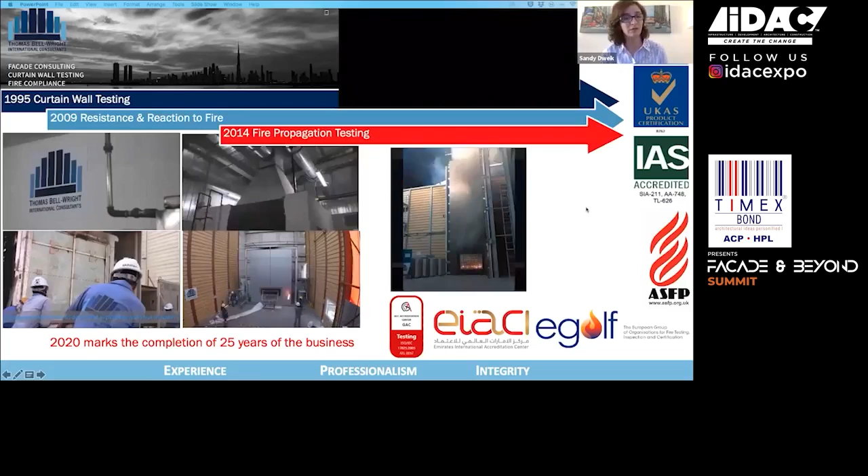For those of you who might already know us, we have started 25 years ago with facade consulting and curtain wall testing. And then we expanded into fire testing of materials and systems. We are based in Dubai. Our company is accredited by UKAS as a test laboratory, a certification body, and an inspection body. We try to think of ourselves as a one-stop shop for all services related to checking facade compliance, including laboratory testing, fire testing, inspections, shop drawings reviews, everything related to delivering a high quality facade.

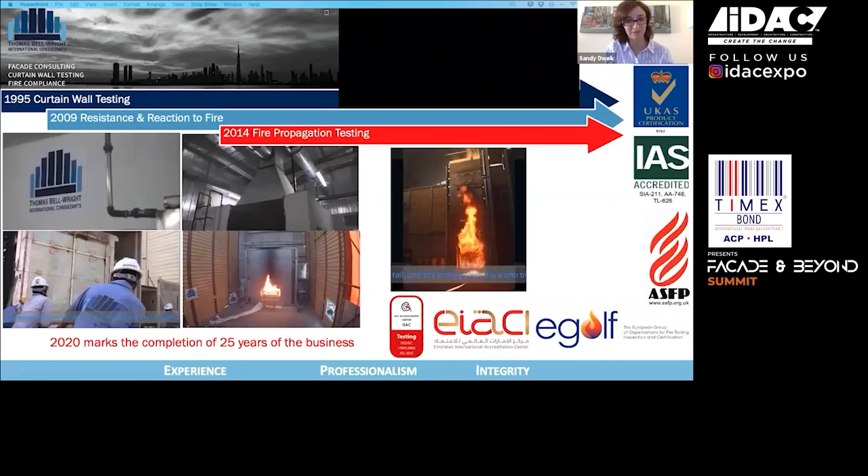So back to our subject, which is the pandemic and how it has affected the facades. So basically, we all went through this painful experience this year, unfortunately, where a new virus was detected in China, and then it spread gradually to the whole world through travel and contaminated surfaces.

In order to contain the spread of the virus, many countries imposed voluntary or compulsory restrictions on travel, on movement, going to work, going to school. And the result was that many people spent a lot of their time at home or confined in closed spaces.

During these difficult times, people felt down, they felt pressured, and they wanted to connect to the outside. The only connection to the outside was through their facade into their surrounding, which can be the facade next door, the street, or any other view they had around them. Of course, human beings by nature are artistic. They tried to make the best out of this. Some people decorated their surroundings, some decorated their facades, in order for other people who look at them to be happier.

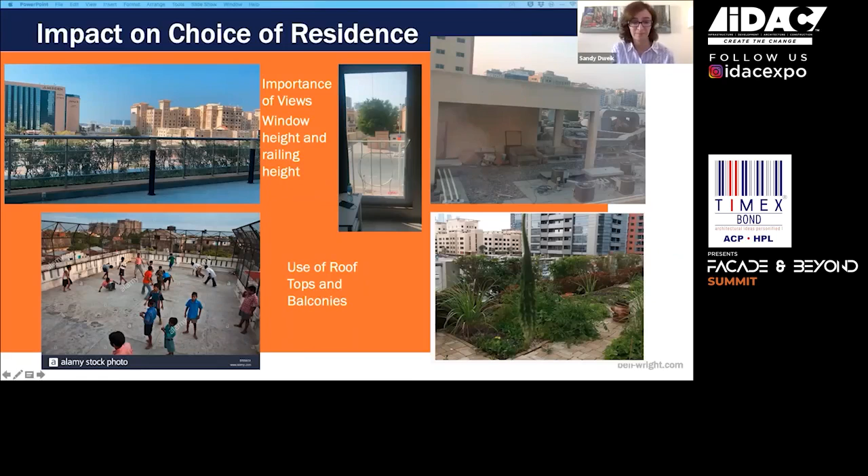With homeschooling and working from home, the line separating work and residence became blurry, it became mixed up. Many companies have already set up for their workers to do their work from home, and this had some advantages that such companies have noticed. They might implement this on the long run because it has its pros and cons.

So people try to make the best of the situation, they try to make their surroundings better. For example, this is a small video of a balcony for one of our managers here at TBW, who decided to make it more green in order to make it more usable.

The impact was the same on commercial buildings, to keep their employees safe. Some companies worked in shifts to enable safe distance, or allowed some of their personnel to work from home. The office space itself became a place for brief meetings and planning rather than for doing the work itself.

Online cubicles or smaller meeting setups physically in the office are now more the norm this year. In a way, the demand on office space has changed a little bit, with the possibility of having a remote office that is less expensive, linked with the main office. Decentralized offices are also a consideration for the future.

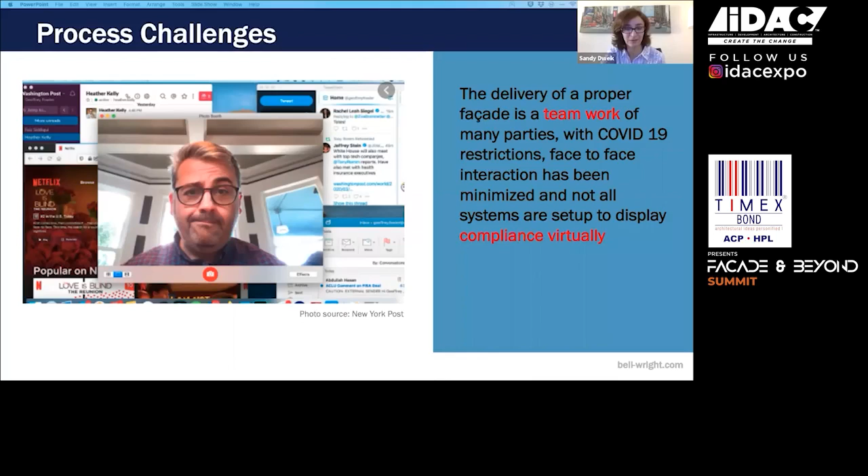But why is the process more challenging this year, and why will it be challenging from now on if we continue with this trend? We are all working from home now. We were pushed into a sudden shift in collaboration and checking process to be more electronic, more distant. With the restrictions on face-to-face interaction, you need the expert eye that is trained to find discrepancies, and you need the expert opinion to give you solutions and oversee any problems before they happen. So we all have to work together, the contractor, the consultant, facade specialist, third-party reviewer, to deliver this remote system delivery properly.

Also, the interruption of supply chain in some industries has moved projects to choosing locally available material and systems to avoid such interruptions. In some cases, the new materials are not exactly the same as what was used before, and they should be reviewed and tested to make sure they serve the same function and work efficiently together. While all stakeholders are doing their best to meet these deadlines, finding alternatives and making sure they work has become crucial, because the work has to be resilient enough to take some changes and to be reviewed properly for such changes.

The testing process itself is also undergoing some challenges. In order to validate the design, a representative of the system should be installed at the laboratory before installation starts at site. In some countries, laboratories are not available, and these mock-ups are shipped to the lab, where testing and installation is witnessed remotely. Mock-ups are also assembled remotely with remote supervision. This is also a change that might go on for a while now, and it might also be proven useful for the future.

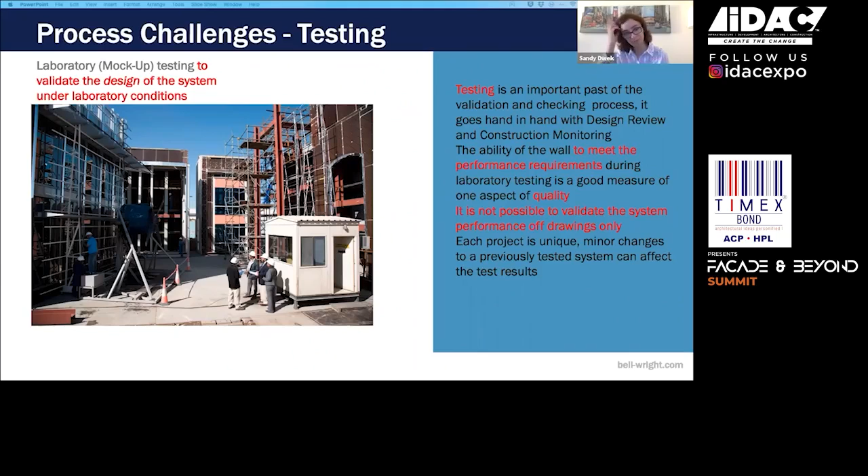An efficient envelope is an envelope that works properly. It is an envelope that does not have any leakage. So you don't have to put your air conditioning on all day to compensate for leakage. You don't have to put your heater on all day to compensate for leakage. During these difficult times, you don't want your power bill and your electricity bill to go up because of an inefficiency in the facade.

Another very important test is a balustrade test. People are spending more time on balconies, children spending more time on balconies, leaning forward. This can be tested. Balustrades can be tested for point loads, for distributed loads. I think this is becoming very, very important.

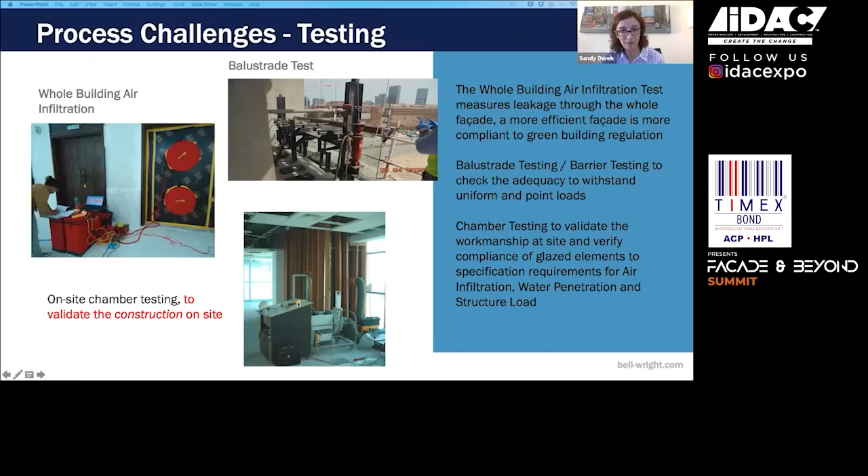Also, site testing to validate the construction on site, with the delay in material reaching the site and the difficulties of construction at the moment, it is very important to make sure that each facade element is working properly according to the performance requirements.

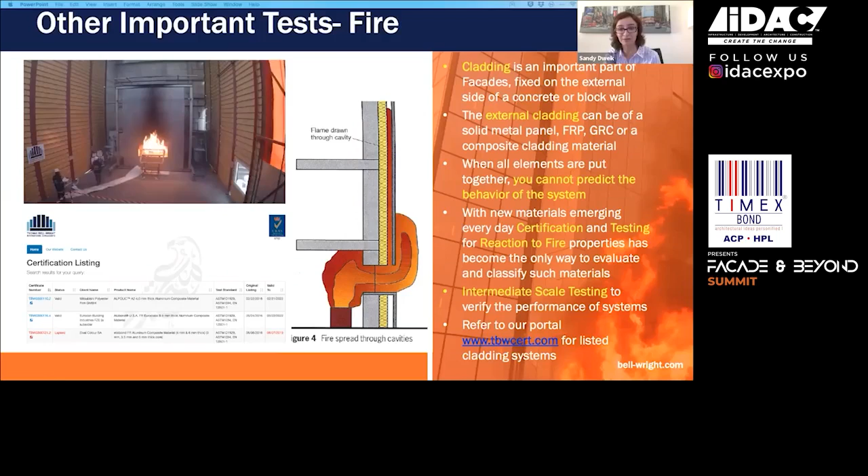There are other important tests for materials and systems which should not be overlooked as well. It is important to specify, choose, and install material with the right combustibility as per the code requirements, and systems that are compliant as a whole, that do not spread a fire in case it happens fast, and give time for firefighters to manage such a fire.

So if you have a project where these specific tests are not possible to do, systems that are already certified and listed can be chosen for your project instead. Such systems have already been sampled in a controlled manner, tested, certified and listed in a specific portal. For example, this is our certification portal, tbwcert.com. You can go there and pick a material or system that is already proven to meet the testing requirements and meet your local regulation, because this is very important and you would not want to have a project where there is a hazard that might happen later on.

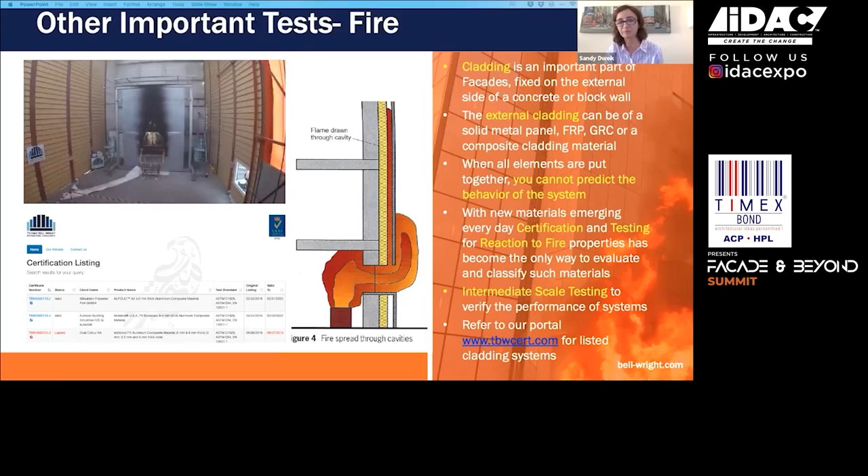With higher building occupation rates, with people spending all their time in residential buildings, the risk is higher, and injuries might be more frequent due to the crowding and the many people using the buildings for longer time. So developers and building owners should be very careful with what they are building from now on, because their reputation might suffer if their projects catch fire, and the expenditure at the beginning to choose the right material and a certified system will be rewarding later on in order to avoid such events.

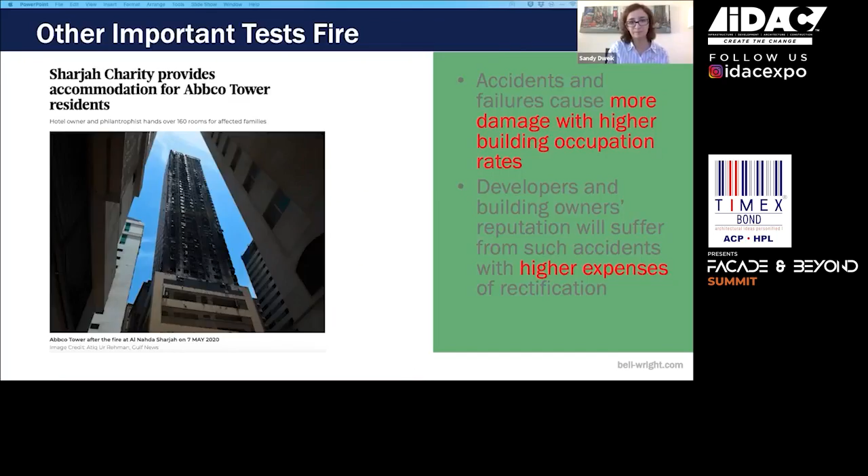Inspection is very important because it's the last step of verification, and it can catch many non-compliances such as deviations from submitted shop drawings or workmanship faults. The project team might have suffered from having some members stuck in certain locations, or groups of workers who were infected, and then other workers coming back might affect the workmanship. To be sure the installation is 100% correct, a skilled third-party inspector can help the team spot non-compliances so they can be amended while the project is being constructed, and not at the end where work has to be repeated.

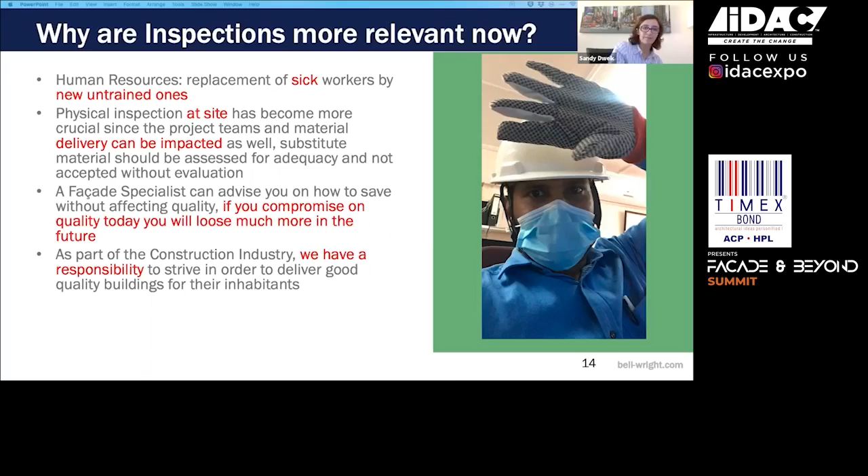People have not had the chance to go out. They are not spending on clothes, on cars, or whatever, but their number one priority has become well-being.

During World War I, people who were sick were put outside to die or whatever, but it was discovered later on that the healing power of the sun and proper ventilation actually helped many people overcome diseases, such as the Spanish flu. And this is translated in today's language to vitamin D and proper ventilation.

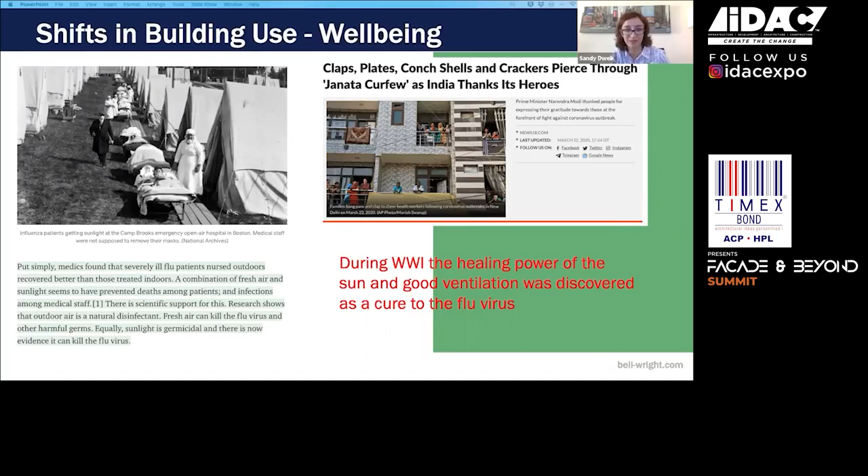All of this has made people much more conscious of their well-being and what the facade can do for them. Do they have balconies? Can they go out? Is there an area in the sun where they can actually get this vitamin D? So this has become a priority for many people.

Not only have people experienced views and external areas, but building users and inhabitants have now had the first-hand chance to experience what an efficient, thermally broken facade can do for them, and a facade that does not have leakage. For example, if you have a window letting in outside air, you have to put your AC or heating on all day. All of this has now become much more known to the public and to building inhabitants.

Bad workmanship and leaking windows and facades contribute to up to 40% of the increase in your electricity bill, and people have sensed that in these difficult economic situations. So again, I would like to emphasize the importance of proper design for a thermally insulated facade, and proper inspections and execution in order to avoid leakage.

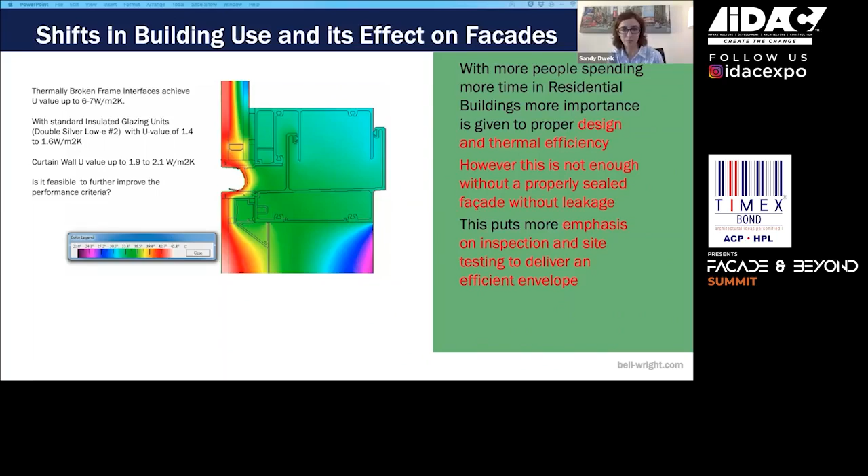The use of the facade is also very important. Clutter on balconies or fire escapes has increased recently, and this is a hazard because you want your fire escapes to be empty - you don't want a source that can ignite on the facade. It is not only the consultant, the contractor, and the people who finish the project, it is also the project user who should be aware of these considerations and the potential source of hazard that clutter can cause.

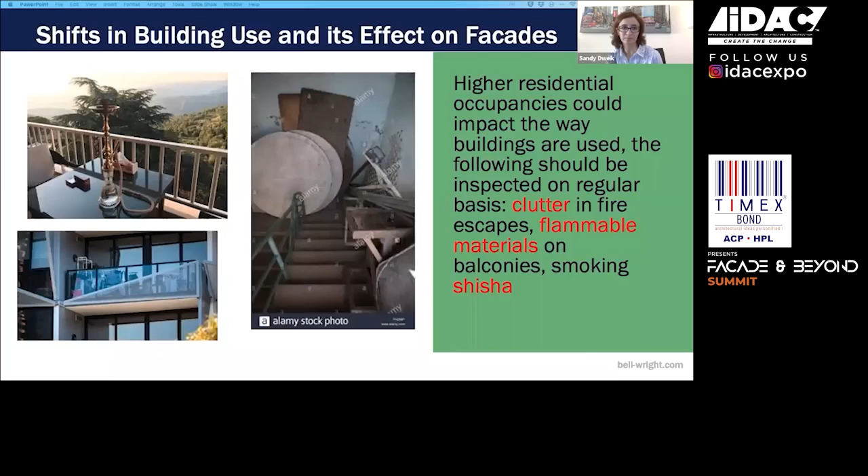So at the end of this presentation, I would like to say that I hope the restrictions we had during this pandemic will end soon. However, the impact of the last few months on the economy might force people to think again and be more creative about workspaces and residential spaces. I'm sure this will be the trend from now on.

Ventilation is quite important - everything that is in a sustainable building requirement, such as views, ventilation, execution. For example, according to a latest study, concentration of the virus in Wuhan itself in an empty hospital was much higher in closed areas such as bathrooms, and the virus stayed for a month afterward, even after evacuating such hospitals.

These are questions we can ask in the future. For now, the consideration we should take is that during this pandemic, people were forced to be indoors for a long time, so they connected to the outside world through the facade, and were surrounded by other facades. So not only did they enjoy having interesting and aesthetically pleasing facades, but they also understood what a sustainable facade is.

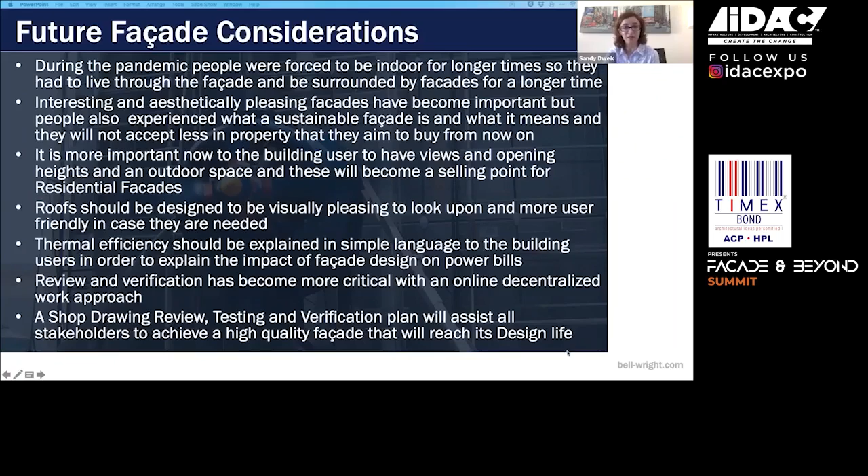As engineers, as facade designers, as facade reviewers, it is our duty to contribute and to have a high quality facade that will reach for a project to reach the design life. So this is my presentation, and I hope that

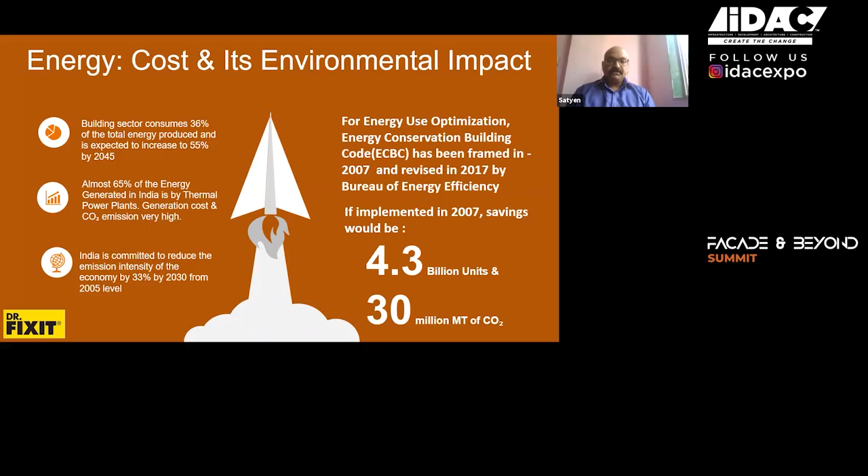India has made its commitment to the Paris Agreement that it will reduce its emission intensity by 33 to 35% by the year 2030. For this, the Energy Conservation Building Code was framed in the year 2007, and it was then revised in 2017. This ECBC code is framed by the Bureau of Energy Efficiency. The survey says that if the code was implemented in 2007, we could have saved 4.3 billion units of electricity, and to add on to that, 30 million metric tons of CO2, which is very, very high.

So this talks about the code in brief. Let me tell you, the main objective of this code is to provide the minimum energy requirements for an energy efficient design for a building envelope and the complete building. The scope of this code is applicable where a building has a connected load of 100 kilowatts or greater, or even a contract demand of 120 kVA, and the building is intended for commercial usage. The ECBC compliance can be achieved by the prescriptive method and the whole building performance method. The prescriptive method is the most easy way to achieve the ECBC compliance, and this can be achieved by new and old construction as well.

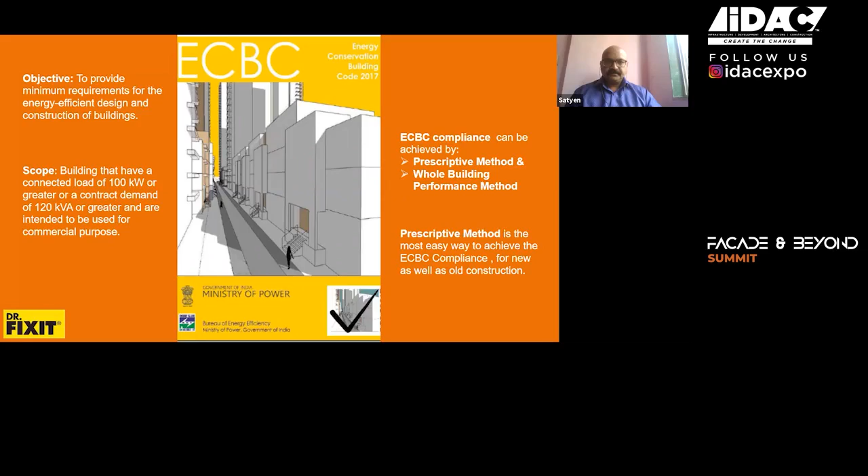This is a table where you will come to know about what the prescriptive method says. The prescriptive method talks about the U value, U factor for the roof, as well as the wall. India has been divided into 5 climatic zones primarily: composite, hot and dry, warm and humid, temperate, and cold. On that basis, you can clearly see what are the requirements for the roof and wall. The roof definitely has a stringent requirement because the heat gain through the roof is maximum, so that's why you will see the U value is very low for the roof rather than the wall.

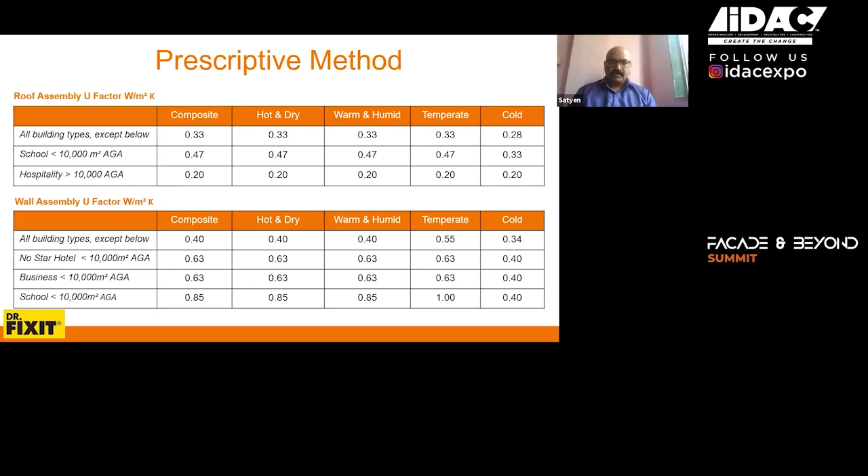So what are the challenges for the facade system? When we come to walls, the present facade systems have their own challenges. The first is very limited aesthetics. Then increased capital cost and operational cost. There is less thermal comfort for the occupants, and also very heavy heat gain. The maintenance cost of the present facade system is very high, and most facade materials are not very environmentally friendly. So how do we face these challenges and eliminate them? What can we do?

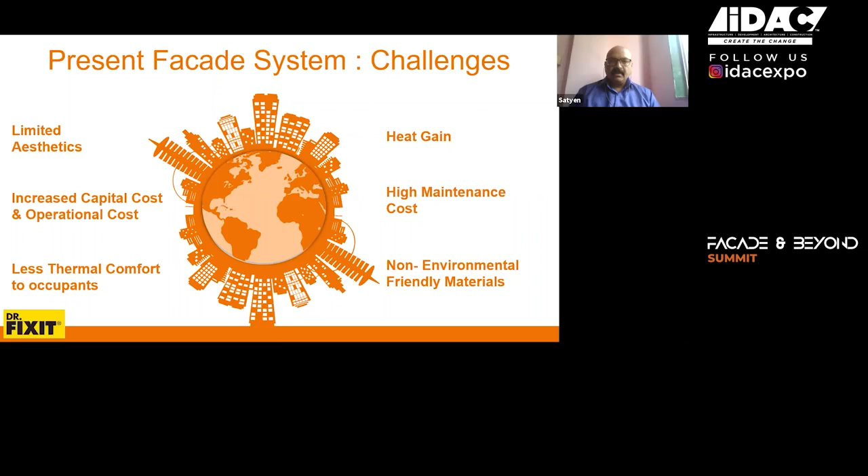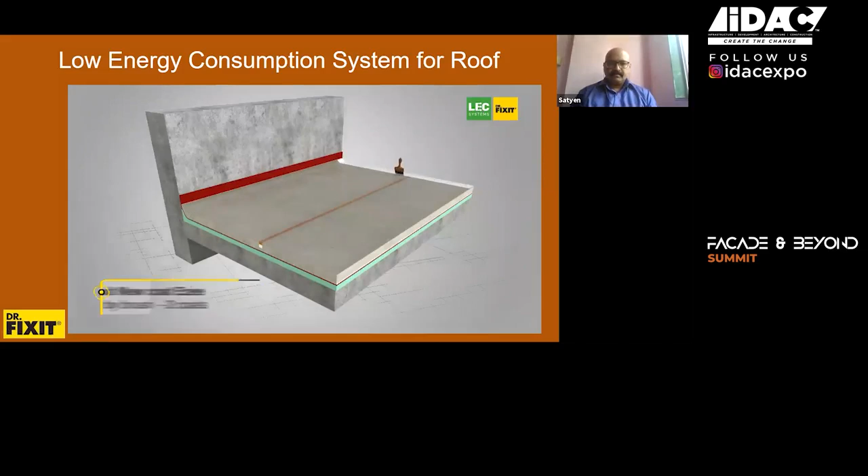So for roof and wall, Pidilite Industries' Dr. Fixit division has come up with two very good solutions. Here is a brief video of how the roofing system works. That was our solution for the roof, a continuous insulation roofing system with a very high SRI of more than 100.

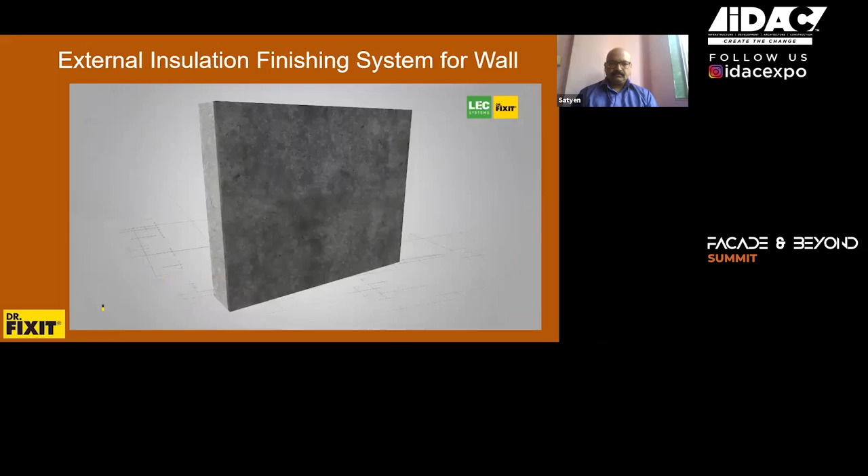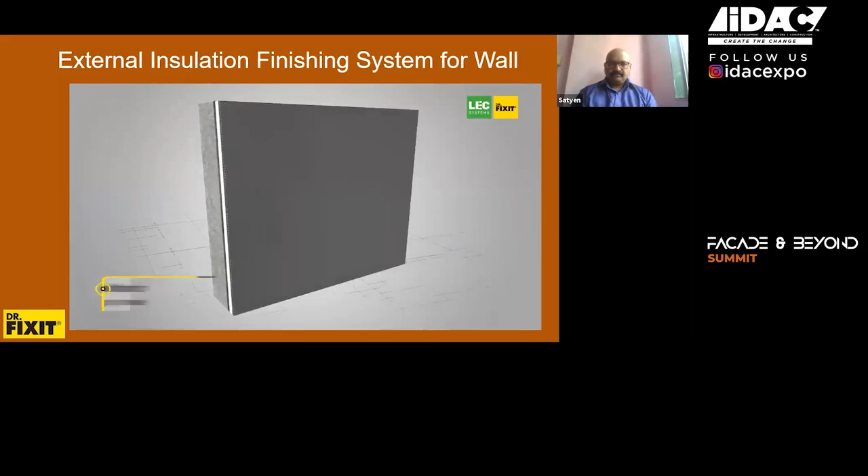Now let's move on to the wall part. What do we have for the walls? This is what we have. That was our wall insulation system.

Now what are we going to achieve with these kinds of facade and roof systems? These are the basic key features and benefits of our LEC system: minimum heat gain through your walls, resulting in thermal comfort for the occupants. We also give you a waterproof and crack-free wall. These systems are also very fire resistant, and you can choose from different colors since it's offered in various shades.

With these wall systems, you can also achieve ECBC compliance for both new and retrofit projects, with a payback period between 3 to 6 years. It will also give you significant savings in your refrigeration tonnage, resulting in reduced daily running bills and improved efficiency for occupants.

These systems also require very low maintenance and give you a faster ROI. We are equipped with a well-experienced application team who have been executing projects for almost a decade with this system.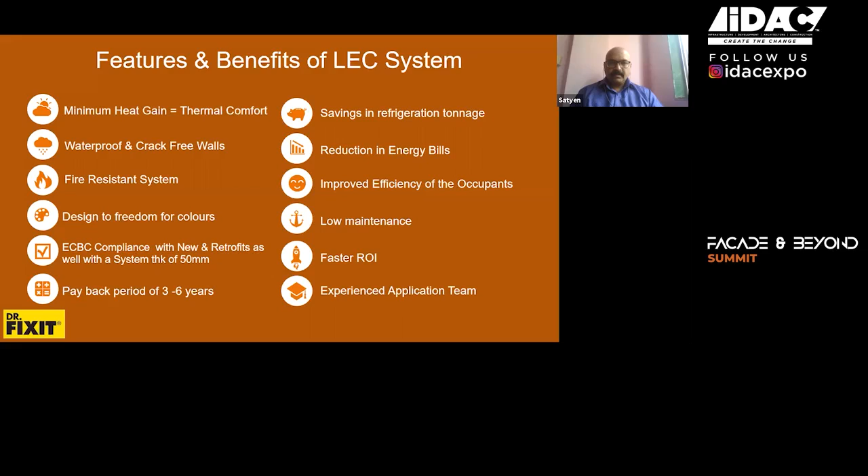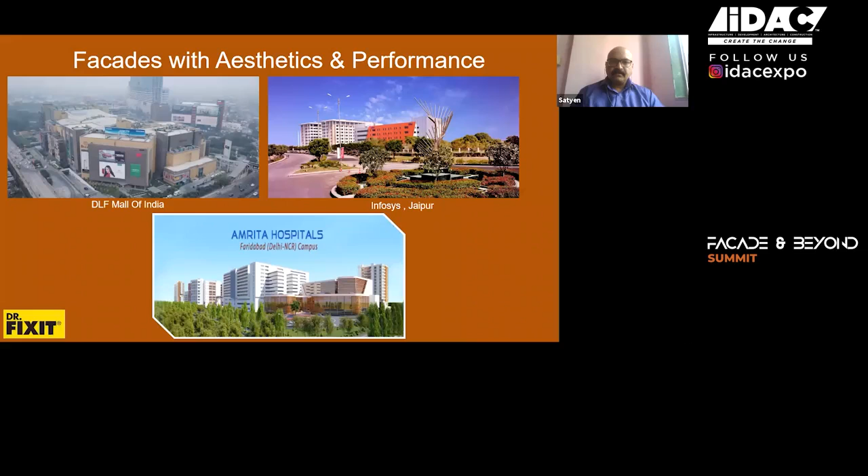These are a few of our credited projects in India, where you can see they look beautiful as well as perform well in terms of aesthetics, performance, and energy bills. You can also see DLF Mall of India, Infosys Jaipur, and presently we are working on a hospital in Noida and a campus in Faridabad. These systems are very much aesthetics and performance based. Ideally, you can achieve an aesthetic look for architects as well as performance for the developer — a win-win situation for everyone.

So let's start then, pulling up the presentation. It's there, everybody can see it? I've put together a presentation on our work at the World Towers in Lodha Place.

This is work that has gone on now for more than a decade, starting with our master plan, which I'll describe a little bit, and how that emerged and developed into architecture over a long period of time, much of which involves facades. A project this large involves a great amount of interiors, a great amount of planning, but ultimately the expression of the project, the image, the iconography of the project comes through its facade, so those have been very important all the way through.

I did this work on the World Towers almost entirely as a partner at Pei Cobb Freed, where I was for 20 years. Subsequent to that, I joined Lodha in-house to work on a very large planning project called Palava, an extraordinary experience. Then post-pandemic, or during the pandemic, I've been more based in New York and have established a consultancy here doing architecture and planning called Halls Lane Studio. Essentially I'm doing the kinds of things I've done my entire practice, albeit from a different platform.

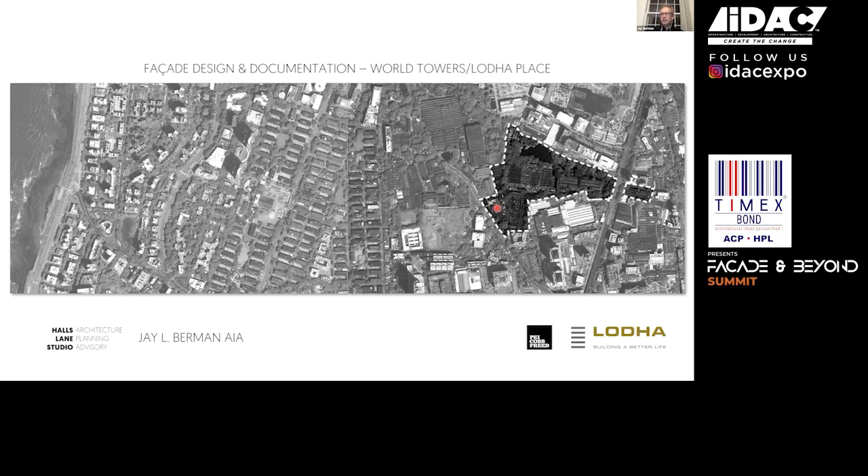We were to begin an iconic development which they imagined would really be their signature going forward. I'm going to skip through a lot of this, but when we began this project, we had been approached by many developers many times to do projects in Mumbai on mill sites. We rejected almost all those opportunities because everybody just wanted to go ahead and build buildings. A 17-acre site in the middle of Mumbai, such a major opportunity.

For us, it's a major opportunity to make a piece of the city, not just stuff that happens in the city. As we looked at the site with its very small amount of frontage on SB Road, but very incredible location, we said the actual major opportunity here was to make a place. The red line curved on this screen that you see is actually, over more than a decade, the most important thing we ever did on this site.

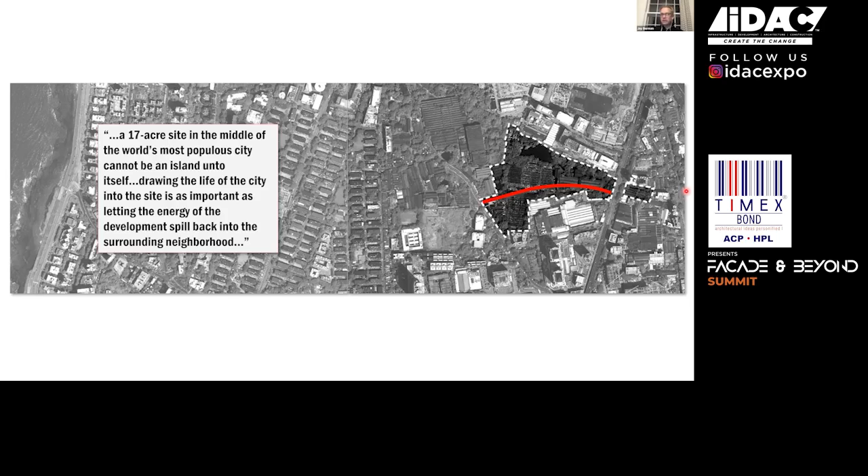Because Lodha Place is a place, it's a street, it's a part of the city, and all the buildings - almost 6 million square feet that we've built in the subsequent time - relies on that for its image and for its iconography, really at the ground as much as at the skyline.

Some quick diagrams from the end of the master plan stage, which took about 6 months, in which we organized the site and figured out the major outlines of how the project would proceed: an avenue, or a lane as we call it, with a gentle curve, 3 very tall residential towers, and 2 gateway office buildings. And of course, a very significant amount of important amenity space for the residential towers, and importantly to us, a major amenity space with a public park with active retail for the city.

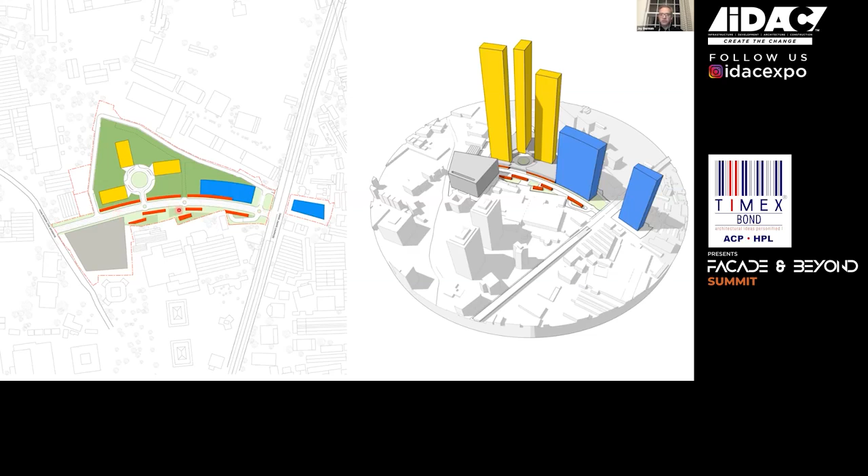Over the next period of time immediately after the master plan, we developed an idea about architecture and what buildings would really look like, but also how buildings would integrate with the city. Most importantly, and this will be a theme as I discuss the rest of the project, what ultimately ended up being 6 major buildings, 3 residential towers, 2 office buildings, a clubhouse, and a whole lot of interstitial tissue which connects it together. How do those hold together visually in terms of image and identity, but also how do they each have their own identity? How do they relate to context, to history? How are they specific to the site?

There were 2 ideas we had at the very beginning which held through the whole process. The first was that this was a textile mill initially, and there was a cue to us from that aspect that has informed all of the facade designs. All the facade designs have this idea of being textures or fabrics, weaving, and the tectonics and visual aspects of the facades all relate to that, and we'll discuss that as we go forward.

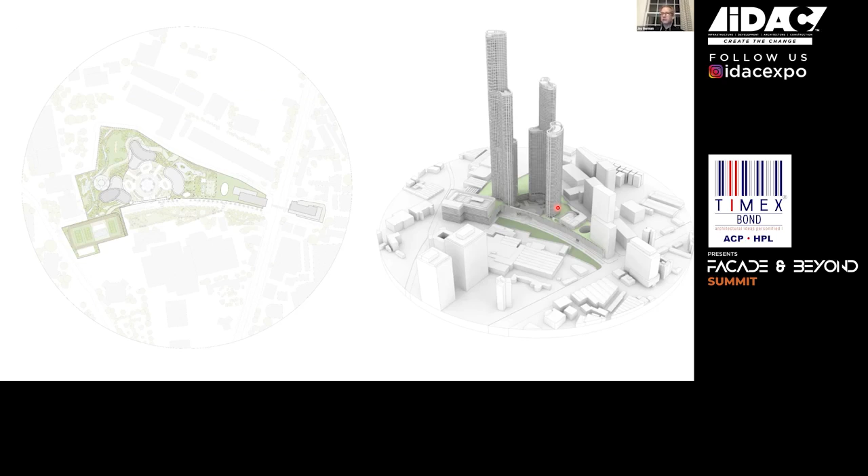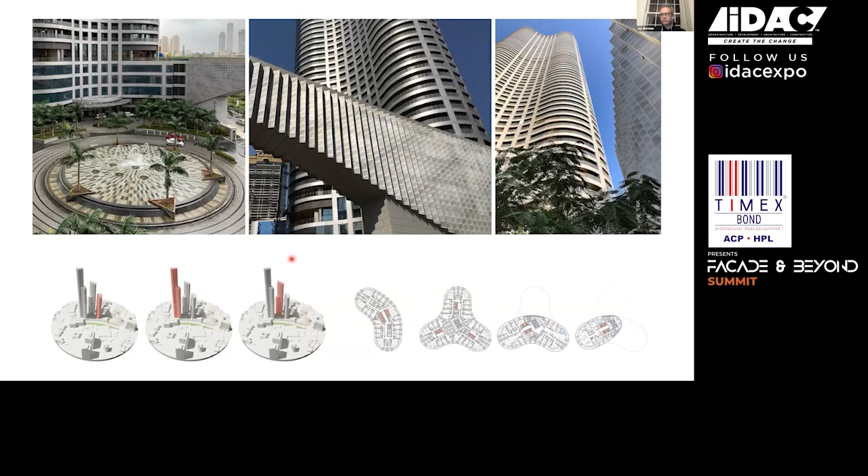Transitions are slow, sorry.

Another group of renderings on the bottom of the screen shows our intentions and how these relationships worked in design, and four photographs at the top show some of the same areas executed. From left: the view from the lane through the gateway towards the towers, then the clubhouse, then the entrance to World Crest, and third the view along the lane.

Most satisfying to me, and interesting to see, are these photos from Instagram a couple weeks ago. Qualia, the great restaurant occupying the space along the lane, took probably a year and a half after opening to start using the street the way we always hoped it would. They did this in response to the pandemic, to have outdoor space, but the canopy and the street feel quite cosmopolitan. I think it's very successful.

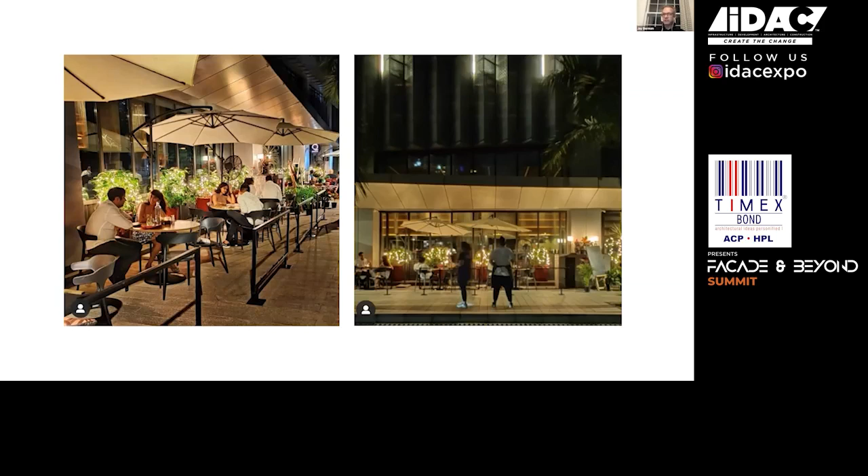Finally, the last piece of this project is One Lodha Place, which is under construction right now. All of the work I've shown you so far in terms of facade is window wall and cladding—very low tech, very straightforward. There were some interesting extrusions along the way, but it's fairly uncomplicated in terms of how it's put together. One Lodha Place is a fully unitized curtain wall.

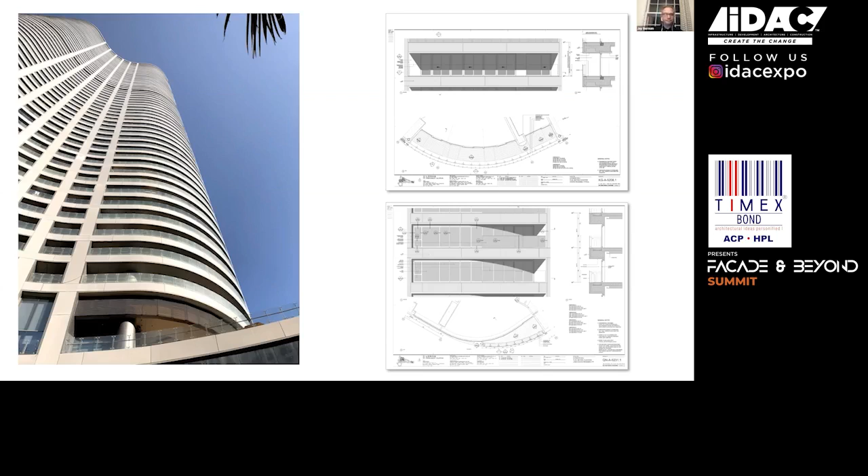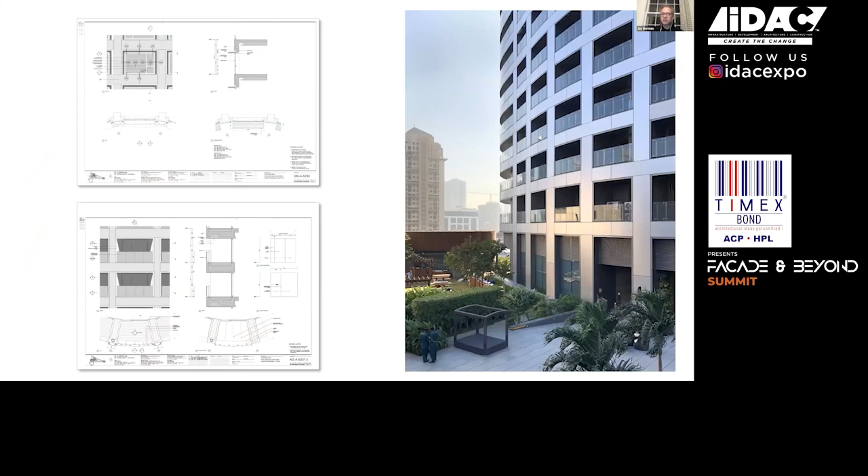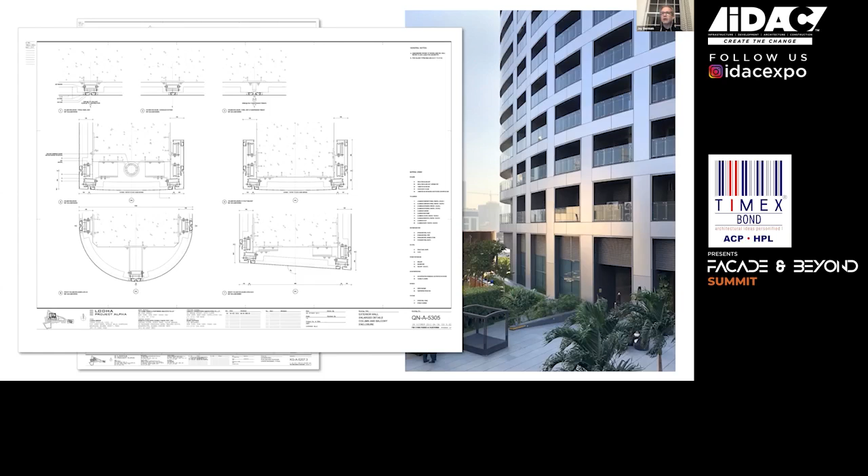The series of slides I'll show now I'll run through quickly, since Nitin will go into more detail, showing how our office developed our intent and understanding of facade in a way that could be enhanced and commented on by Nitin in his process of going from idea to actual building. I'm showing photographs alongside drawings we did to convey the thoroughness of documentation and thought and intention, so that ideas didn't get lost in translation and were worked out well enough at the design stage that they didn't fall apart during execution, or as the realities of how you build this happened.

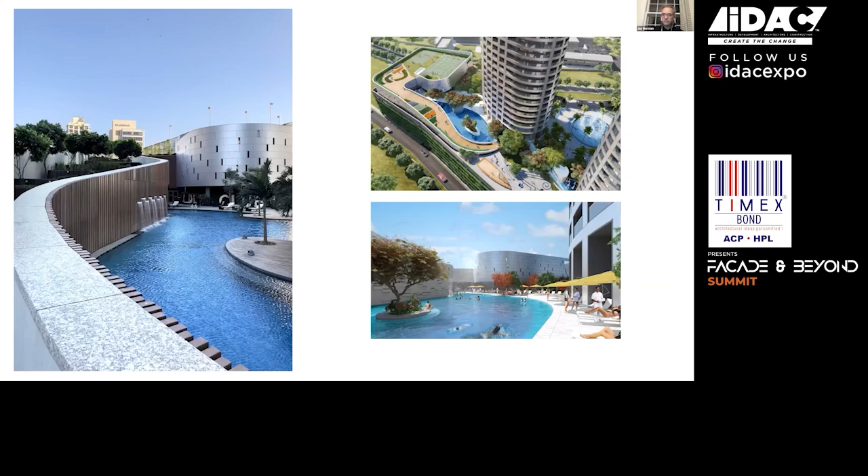The clubhouse—these are all renderings. On the right are renderings, and on the left is the photograph of the finished building. I should say that a couple of other facade consultants worked on some of these pieces, although Nitin has done most of the work.

The clubhouse, after the three towers, was the next facade we designed, and we wanted it to have a relationship but also be different. So it has a material and color relationship. It again has this idea of fabric and textile, in this case a kind of linear fabric with a syncopated rhythm. It had some interesting geometry, some curves, and a lot of parts, and a kind of complexity to it initially, but it's actually made up...

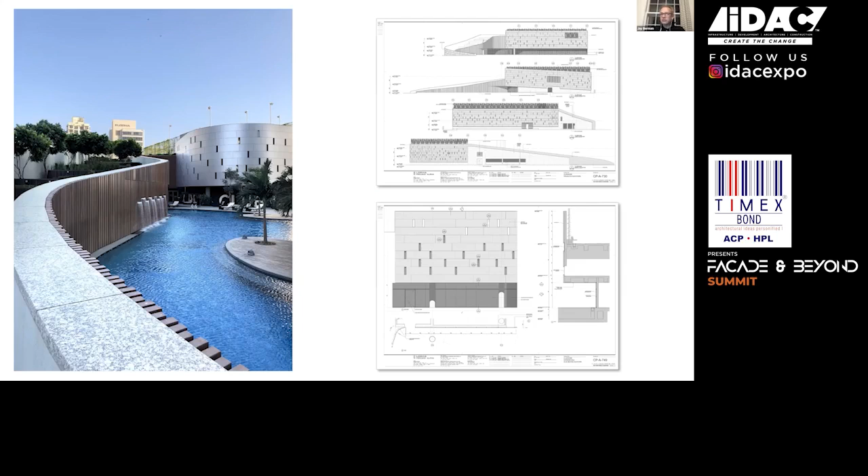It's made up of a very discrete number of parts that repeat. In this case, I think there are maybe four or five panel types, which then get repeated and arrayed. Our drawings were quite explicit about mapping the system and categorizing it.

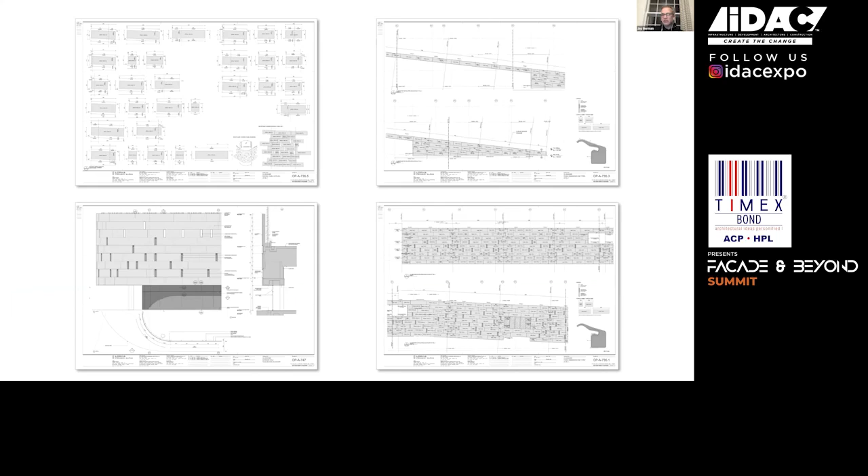Likewise, as we move to the facade that fronts the lane—a very important and iconic facade—at the bottom is retail space and active, nice things. But on top of that are five floors of parking and service, which needed ventilation and had performative aspects. This was a major design exercise to figure out how to create something that doesn't feel like the front of a garage, but feels like a performance worthy of an important new street in Mumbai.

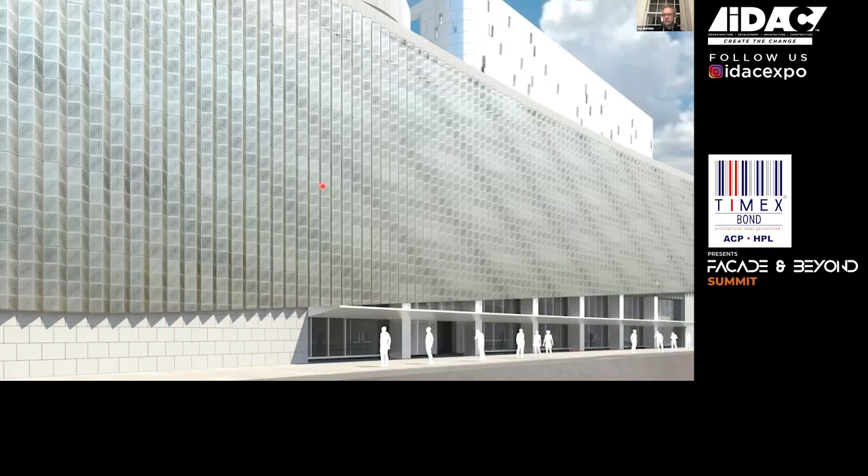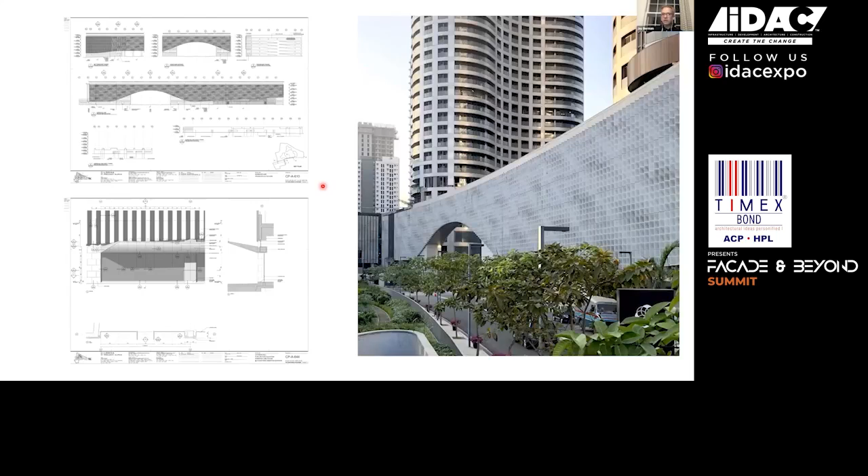This one, in a way, is the most explicitly like a fabric—a kind of tartan. This facade is made up of repeating perforated panels, which look rather complex but again are reduced down to a discrete number of panel types, developed through a parametric process.

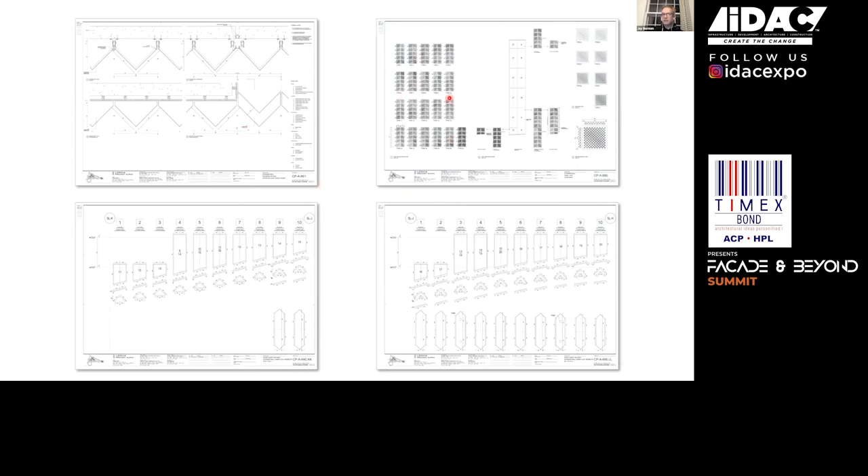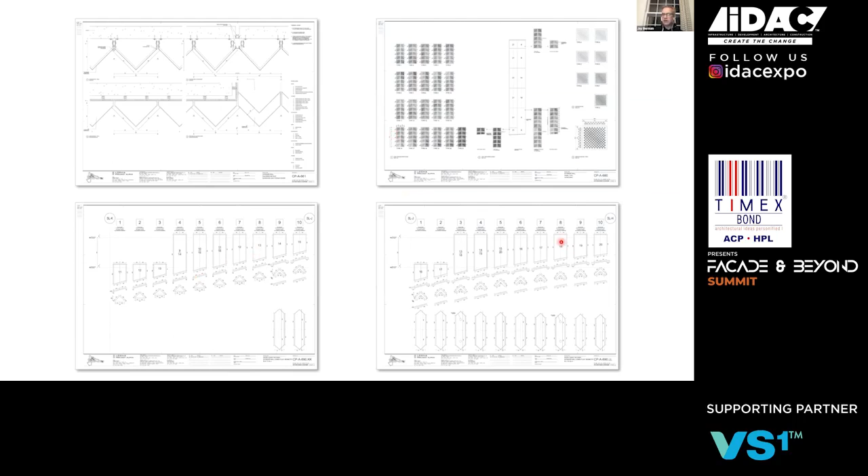The series of drawings you see on the page now kind of indicate the general idea of how it's constructed, the component parts, which were, I think, at the end of the day, 16 or 18 different panels, and then a kind of very rigorous mapping process about how they go on the building. There's a blow up of the panel type, type A through type G of perforations, and then how they combine in different ways.

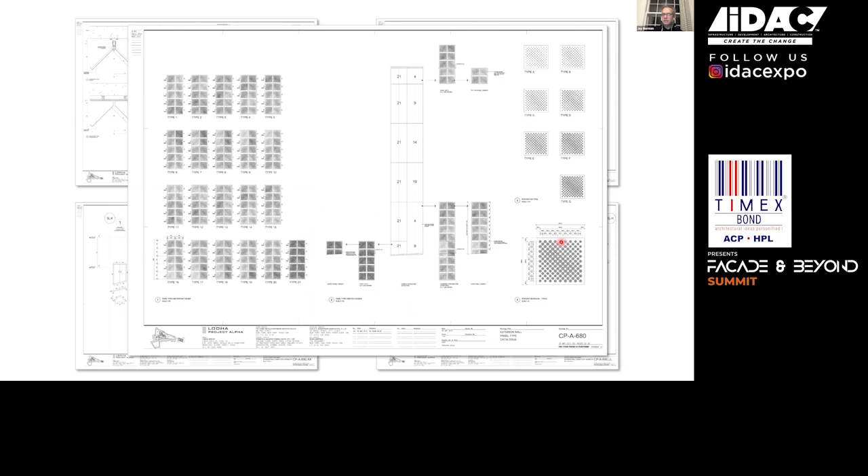That's all. That was absolutely brilliant, Jay. I didn't know of the design inspiration and the fact that you took it from the mills that lay so close to the ground and put it up on these towers, which are going to be there for a very, very, very long time and continue as a fabric of life. Brilliant. Well done. Superb.

So let's get on and see the technical side of the facades. Let me present my screen and show you what we've got.

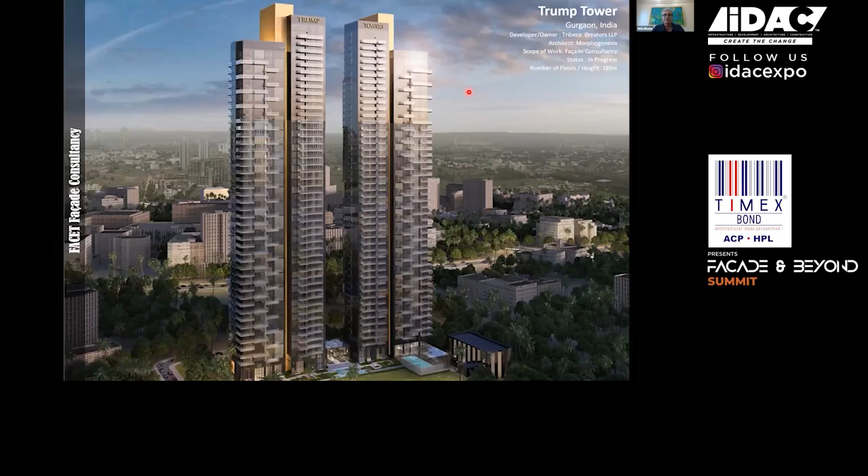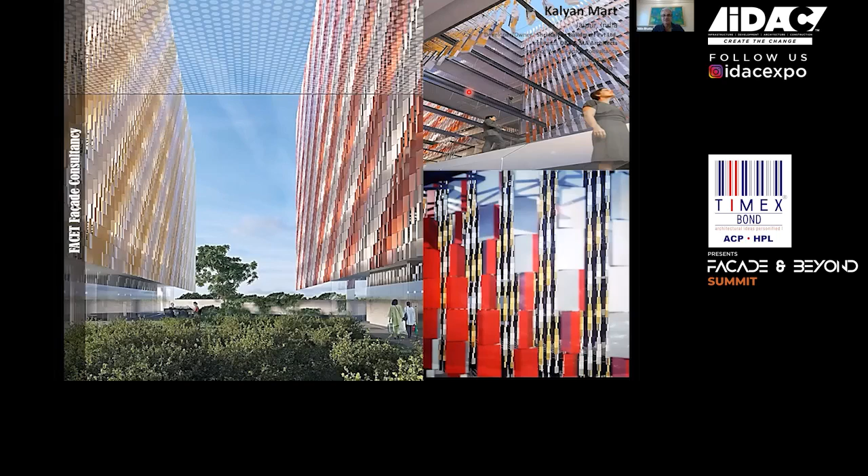Hi, I'm going to take you through a little bit about Facet, a few of the projects we're working on currently: the Trump Towers in NCR and in Kolkata, a 5-building project of commercial buildings in Hyderabad, a very interesting fabric-oriented, inspired facade in Rajasthan, and another very interesting sort of feel of a facade in Qatar.

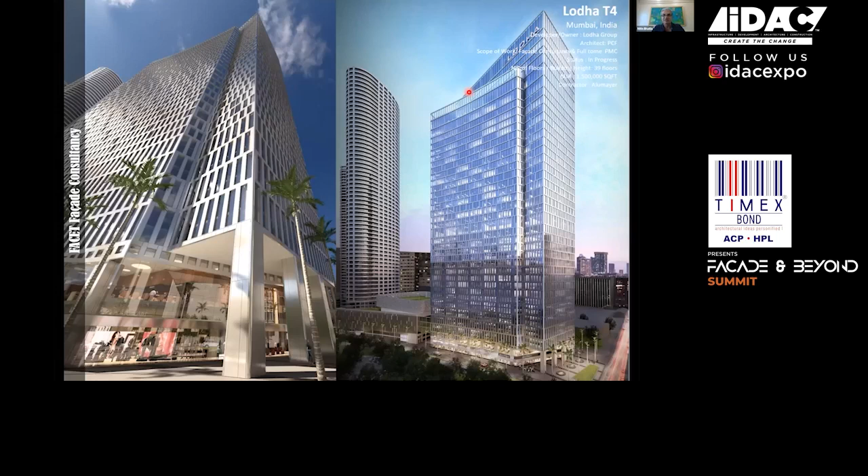This is the top structure of Supremus, which is adjacent to the World Towers across the road. The Tower 4 and the World Towers visible behind. Another shot of Tower 4 that connects to the World Towers. And now finally, the World Towers, the focus of our discussion today.

The inner engineering and performance inside out. What I want to showcase here is what has happened, what has gone through the design of the facade, the technical design, and the thought process that pushed us in our line of thinking to do what we did.

So here are the 3 buildings that you can see. We started on one and then added on the next and then the next. That's how we were appointed on the project. All 3 are sort of similar, though the Queen Tower is different. It has a slightly different facade, but quite similar in nature.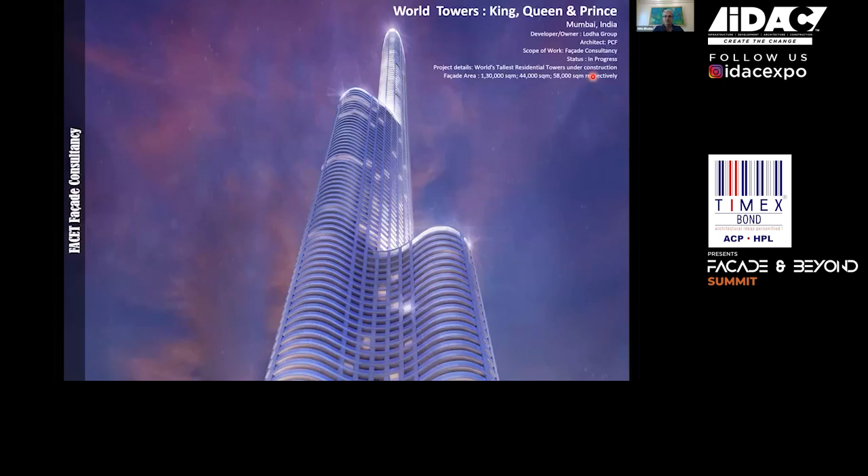Now, when we started working on these buildings, we were told that the client would want to install or complete a floor every week or every 10 days. And the facade design should incorporate a manner or a facility in which the installation could be completed for a single floor in about a week, 10 days.

Before I move on to the actual design—forgive me, I don't have very good drawings to project here—but what we did was we followed a unitized window walling system as well as a cladding system. So everything we did was unitized. You could bring an outer frame, install it, then bring ready-made panels, take them to the respective floor, put them in position, and you're done. So an entire facade like this would get installed in hours. That's how quick it was designed to be installed, and it eventually did when they started installing this.

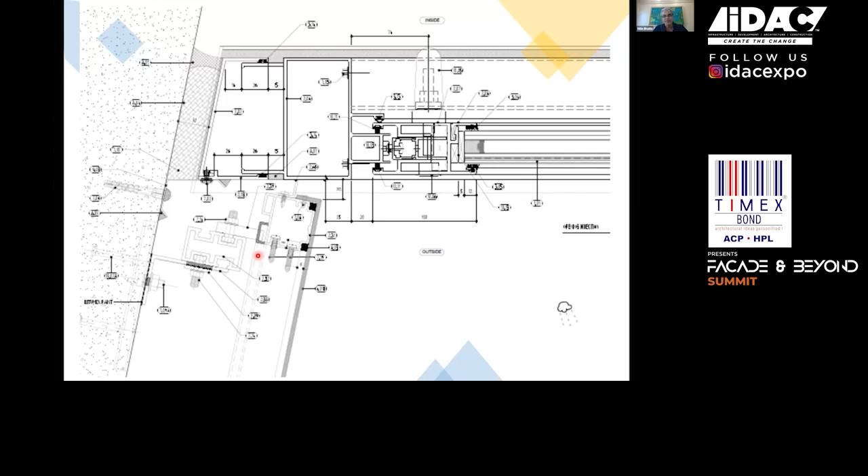The important thing in any building, in any civil structure, is construction tolerances. And these towers were no different. They were very large towers, and obviously there's lots of concrete pouring, lots of formwork and scaffolding. So you would expect some level of building tolerance, which is concrete tolerance. And that's what we had here.

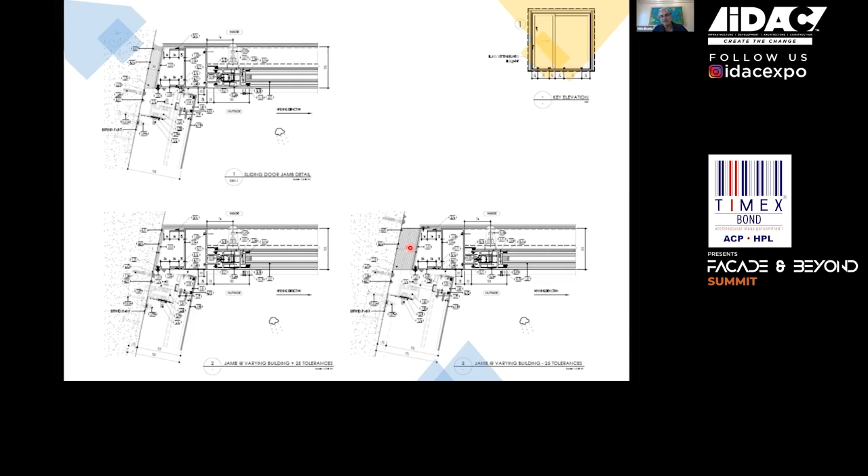The entire philosophy of design on this project was around construction tolerance and how you manage it, because that's one thing that would never hold you up from installing on site, which was so critical.

The system design had to be segmented, faceted. So different strategies were used. We didn't have a typical mullion, but we developed new designs for the mullion and added further strengthening on the inside with these boxes.

Everything was installed, as you can see, in a unitized format, where there was a panel from here to the next module. This was one module and this was the other module. On the left was the other module, and they came together beautifully, tested and performed really well.

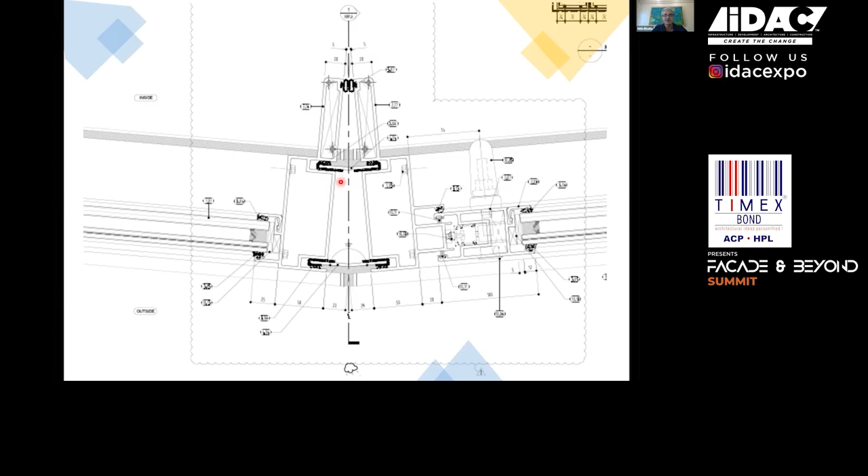Another picture at the head level of the glazing system. Again, we had to accommodate or provide room for construction tolerances, which was ever so important.

There were many other structural constraints or design considerations in the structure we had to consider, including long-term creep, column shortening, and movement of the building. Tall buildings do sway, so you allow for all those movements.

At the same time, make sure you get it installed really quick. So the installation had to be really simple, fast, and very easy for the volume of work that needed to be achieved within a week.

Same goes for the cladding. As you can see, there is the primary bracketing anchor system, and then you had a mullion sort of system every so often, which connected to a hooking system for the actual panels.

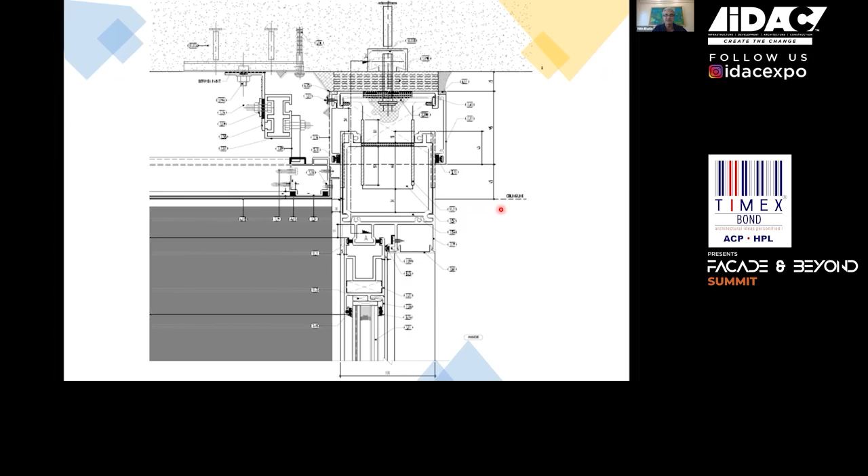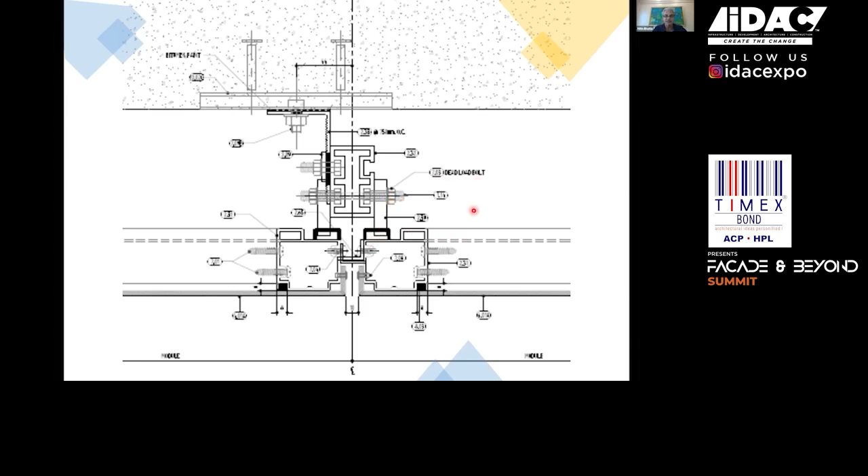Another plan view of the cladding system. Again, I wish I had gotten you better pictures, but I think it gives you a gist of what was being done, how it was being done, and again, a unitized format employed across the board.

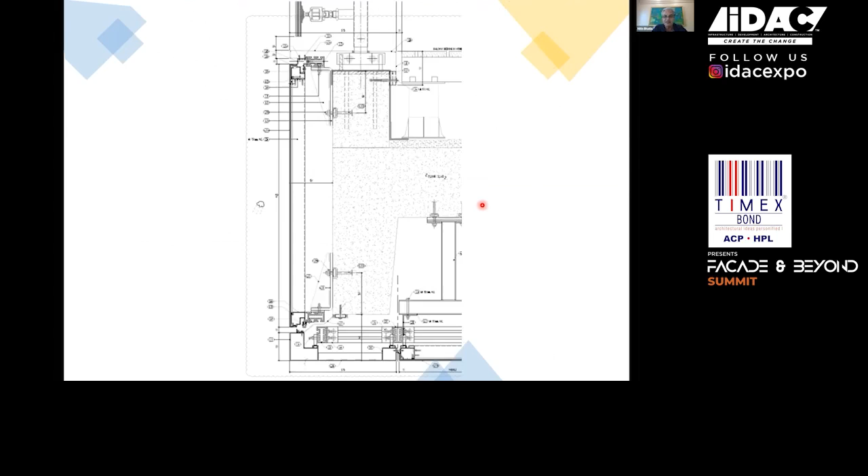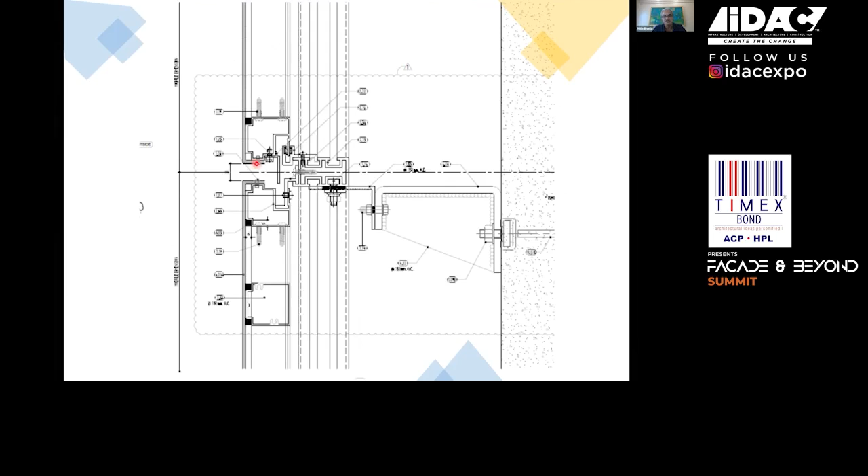The railing systems were, we're still on the cladding systems. And here's a horizontal detail, if you can see over here. Again, it demonstrates how the units come together. They're open grooved, and allow ventilation as well as water drainage into a pressure equalized rain screen sort of system.

These were edge sort of flashings, very key components in the architectural design philosophy, and very important to actually bring in the balcony spaces and connect with the outside. You had the railings, the balconies, and then the outside cladding. To marry all of this was extremely critical and not such an easy task.

But what made it happen quite easily was the method of design that was followed, how it would all go together and how all these pieces would work with each other, allowing movements, allowing tolerances to be accommodated, and keeping water out.

So if you can see this flashing, this is the column, and this is a rain screen pressure equalized sort of cavity at the back, and any water which gets in here wouldn't come into the balcony space. There were drains that would allow water to go out down the panel.

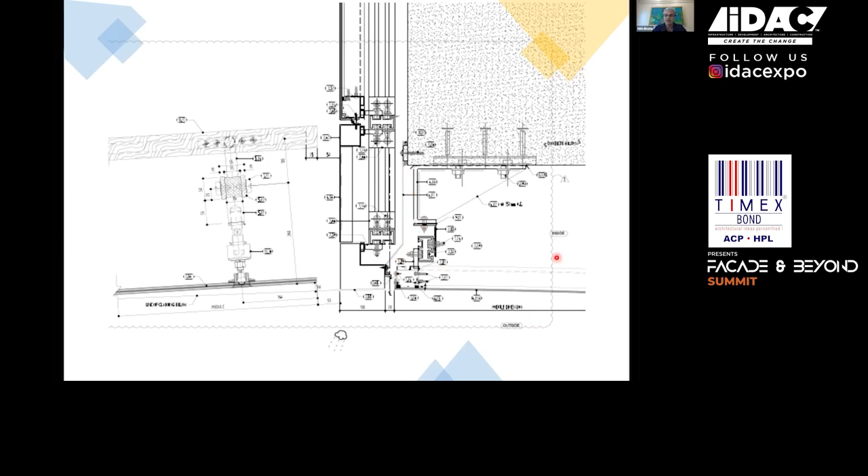The railing system, again, a system where a strategy was employed, where there was an embed installed or a bracket installed, which allowed a further bracket with a rail. A ready-made system would come on site, get bolted on, the glass would get bolted on, and there was no fabrication done on site, zero fabrication. In all the cases, there was zero fabrication done on site. I don't think we had any holes drilled on site as well. Everything was done in a factory and installed here.

And that's about it as far as these projects are concerned. Again, whilst the look and feel was very simplistic, and I know a lot of people who've seen these buildings say, 'Oh, it's only cladding,' but I know the pains that the entire team went through to make this happen, to get this to be able to be built in the manner it was to be built. And I think it's turned out brilliantly. The basket weave has been amazing, amazing concept, and the engineering was one hell of an experience on this particular project.

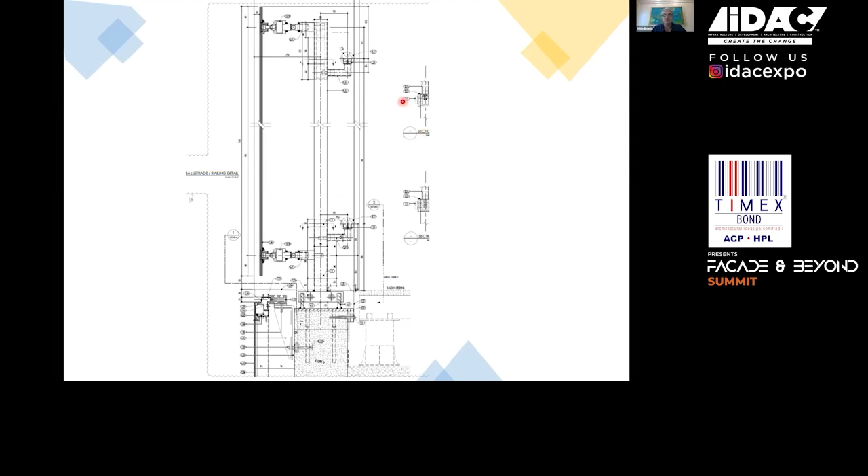So it has been quite a journey on that project as well, and I remember when we were tendering out, I think it was World 1 as the first project, and we were tendering out. I remember having our discussions with Mike where we were all very clear that it was going to be a unitized sort of format of construction, and we had contractors from all over the world. The biggest of the guys came to us, and some of them said, no, it shouldn't be done as a unitized system, it should be done in this manner, that manner. It can't get done, that can't get done.

And we said, no, it needs to follow the philosophy we have, and there's a reason why we want to follow the philosophy. And I'm glad we did. We stuck our ground as far as that was concerned, and eventually proved it could be done, and not just be done. We did it three times over on three different towers with three different contractors with three different designs, which is proof that when you put your mind to things and you put yourself behind it, things happen. You must believe in what you want to do. So it's been an amazing experience, these projects and developing designs of these projects. The facades have had their own sort of life, so to say.

Definitely. Yeah, I think I feel bad that during my part of the presentation I said certain things were simple, because of course they weren't. And the gray hair that I have, my hair got a lot grayer during this process than yours did.